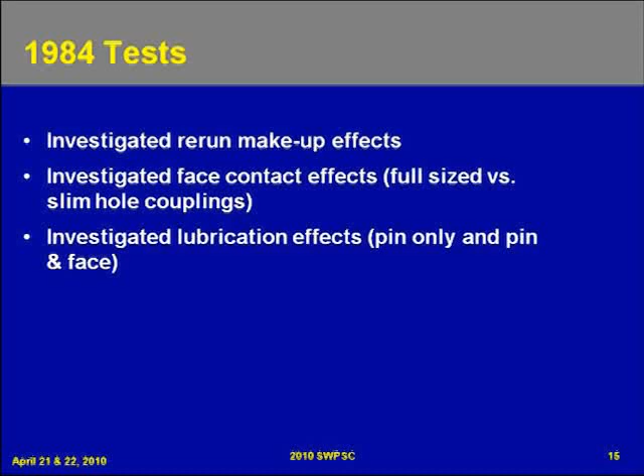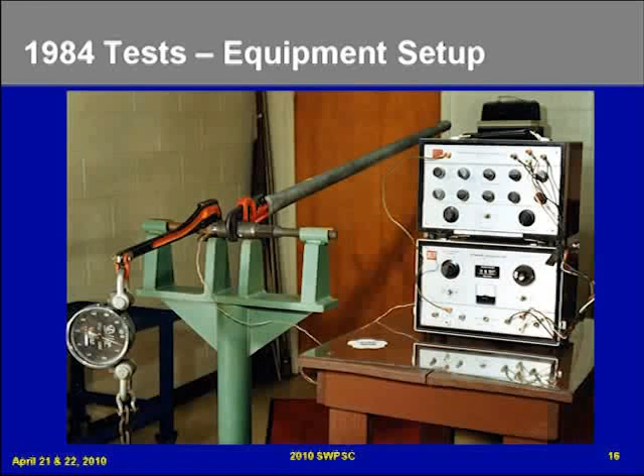They reran the test and then reinvestigated the test. So they investigated rerun makeup effects, investigated face contact effects versus full-size coupling versus a slim hole coupling, and they looked at lubrication effects for a dry face versus a wet face, or lubrication on the face. Again, same test equipment, same test. The only difference is now we've gone from a black and white photograph to a color photograph.

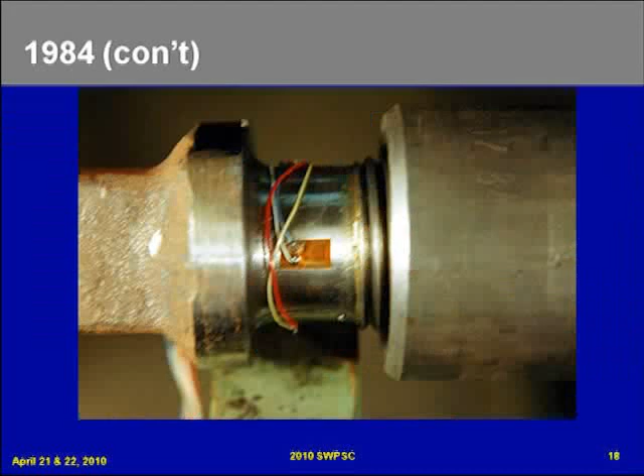Same equipment, same gauge measurement, the same strain gauges were used. Everything was consistent from the 68 test to the 74 test. Oh, this is the 84 test. Here's a photograph of the strain gauge being placed in the undercut of the pin. And you can't see the hole drilled through, but you'll be able to see it later.

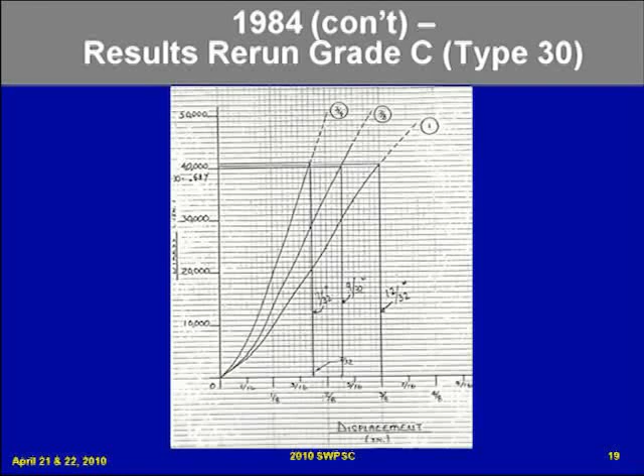And in addition to this, and as we'll see as we get towards the back of the slides, one of the things that I found in these documents on circumferential displacement is a lot of this stuff was done in combination with the bolted joint industry, and there were a lot of papers in the bolted joint industry that correspondingly resulted in some of these tests.

For example, the undercut of the sucker rod pin. Prior to about 62 or so, the API sucker rod pin was threaded all the way to the end of the face. So it was a full thread, no undercut or no stress relief. In about 58 or 59, we started playing with the stress relief for the undercut. And later API adopted that, and that's now the sucker rod pin that you have today.

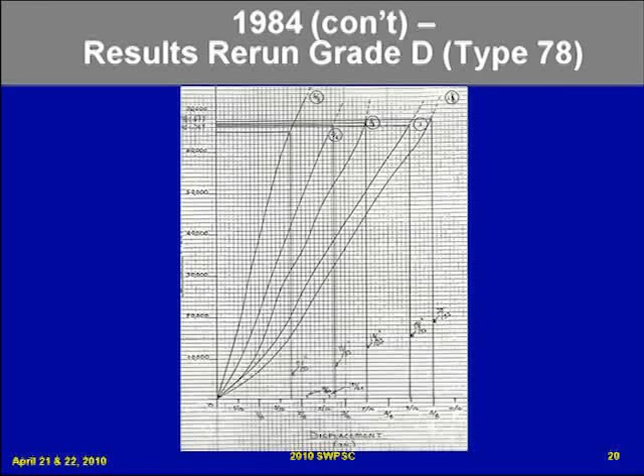But looking through these documents, I found an article where the idea for the stress relief for the undercut in the pin actually came out of the bolted joint industry, where they referenced the U.S. Air Force was trying to reduce the number of bolt failures that they had in their aircraft. So they went to a stress relief for an undercut bolt to reduce bolt fatigue. And the engineers and owners back in those days applied that to the sucker rod connection, and API later adopted it, and that's how we have the undercut or stress relief.

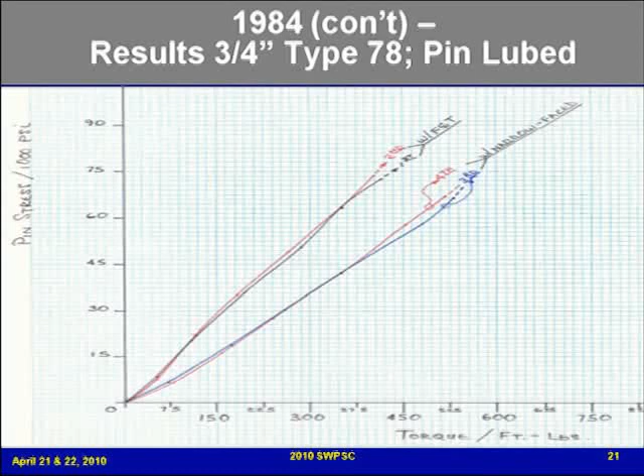Here's our results of our 3/4 inch Type 78. Now, that's basically a D alloy rod for API's nomenclature. Now we're looking at full size, and we've got the slim hole, and we're looking at the pin lube versus a wet face. Or is this just completely lube? I think this is just the pin lube. This one is the face lube. So they were looking at the differences between a dry face makeup and a wet face makeup back in 1984.

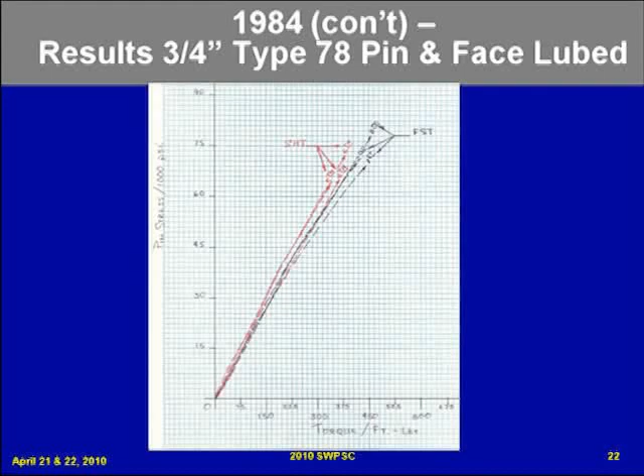So basically they verified the CD results on C's and K's at 40,000 psi. They came up with a new pin pre-stress for the D-grade rods of 60 to 65,000 psi. They looked at torque requirements versus slim hole and full size, or the face coupling contact width, in 84. And they looked at the lubrication effects from lubricated pins to dry, from lubricated faces to dry faces. And then these results were provided to the SC11 subcommittee that was looking at 11BR, and those changes were incorporated in RP 11BR and published.

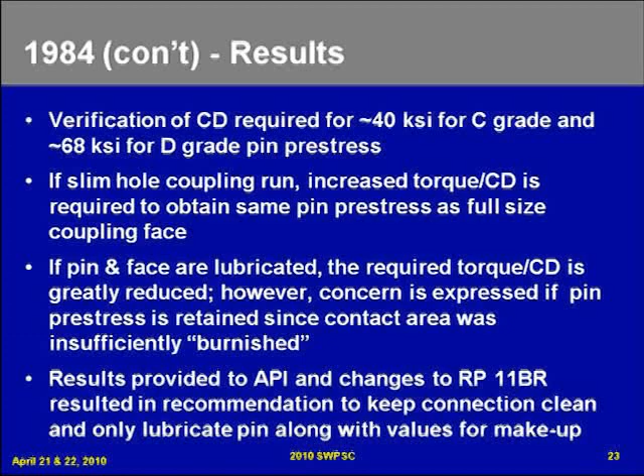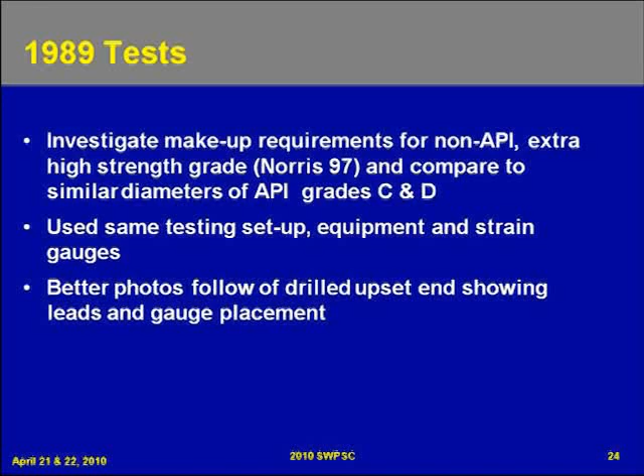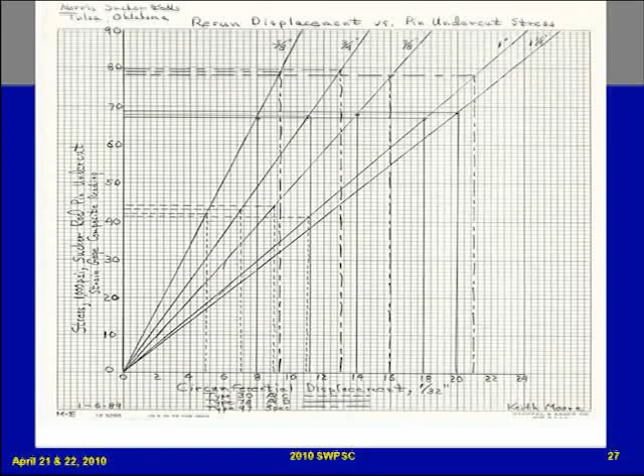So all that testing was basically looked at in 68, 74, 84, and 89. But I also have some papers that I found, that Norm doesn't have as of now, where they did some testing in 91. So they have essentially looked at CD testing in every decade except from 2000 to 2010.